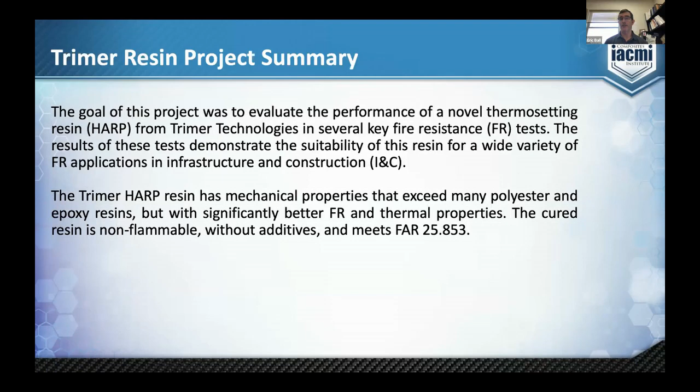The goal was to test the Trimer resin. It has mechanical properties that exceed many polyester and epoxy resins, but has significantly better FR and thermal properties. In fact, the cured resin is considered non-flammable, as opposed to non-combustible, without additives, and it also meets a FAR standard, which is a flammability test for inside of aircraft.

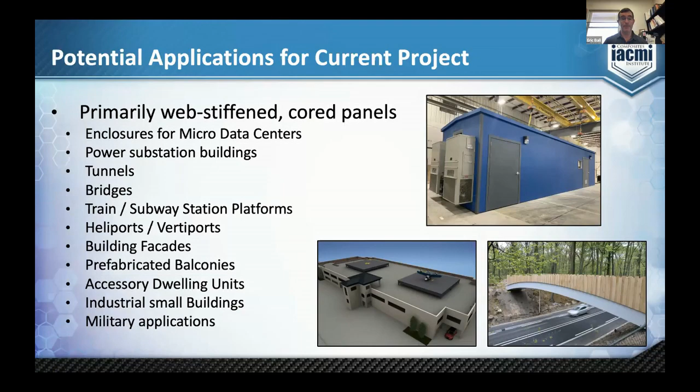So what are web stiffened cored panels? These are all vacuum infused structures. You have a laminate on the top and bottom, and they're connected together with a web. And there's a foam core in the middle that's typically, it can be structural or non-structural, and we tested both.

You can see this within this concept. We can change parameters, of course, the web spacing, web thickness, skin thickness, and of course the fiber architecture. That image on the right is a vacuum infused panel based on this concept.

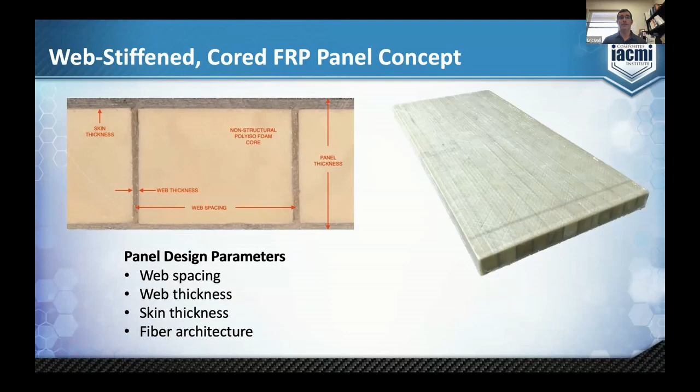So the Trimer resin can be processed with a number of different processes. We focus entirely on infusion, but you can also use RTM, filament winding, or pultrusion.

One of the unique things about this resin is that it needs to be cured at a fairly high, medium temperature, 100 to 150 C. So it's not a room temperature cure.

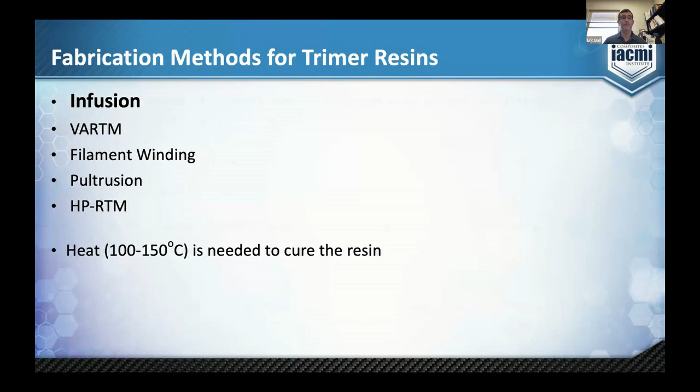So the test schedule that we put together, we eventually wanted to get to an E119 test, which is a pretty tough test to pass. It's really a burn through test.

But we start out with some simple calorimeter testing, which is E1354, to help us decide which direction to go.

We also did E84, which really wasn't necessary to determine how to get to E119, but it was interesting in terms of smoke and flame development. We also did an E119 mini test, which again was a low-cost way to help us decide the final configuration for the E119 tests.

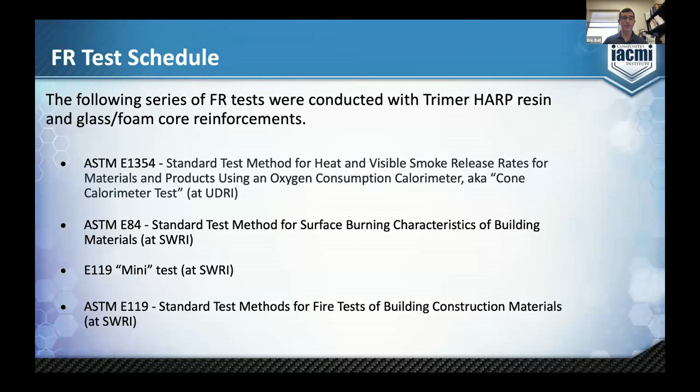So the calorimeter test, here you can see on the left an example of this test, and the machine there on the right. This test measures the fire characteristics associated with heat and smoke output.

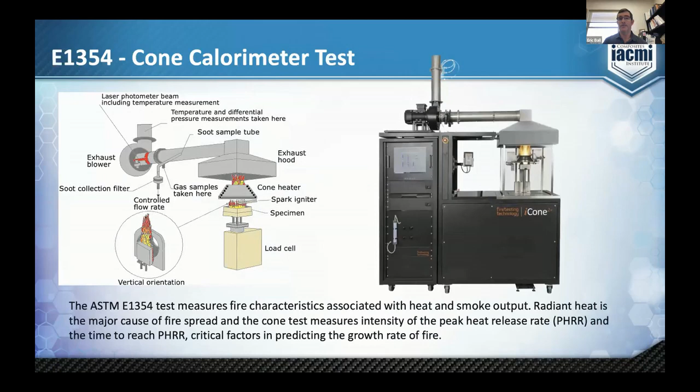So we put together for the calorimeter test 4 different tests. We had 2 different Trimer resins along with 2 different coatings, and we used a ceramic hybrid red coating manufactured by a company in Finland called Finnester Coatings.

As well as a Tecnofire product manufactured by Technical Fiber Products. All of these samples here were non-core, just solid laminates.

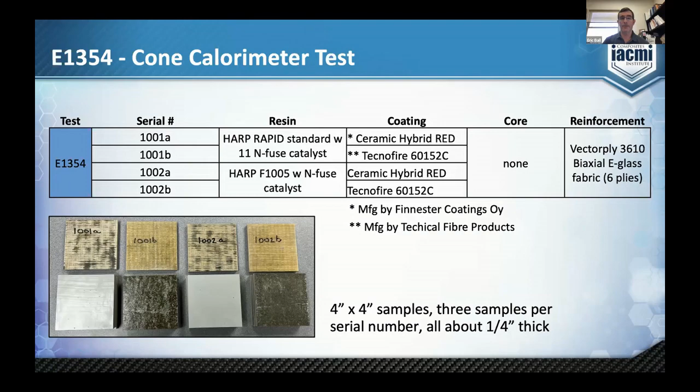This was to help us determine what was going to do best looking at the E119 test. And so these are the coupons here on the picture, 4x4 samples that were run in that calorimeter test.

So here's kind of a shortened summary of those tests. If you want to look at total heat release, you can see that the...

Tecnofire did a better job overall, even though it produced a little bit more smoke than the ceramic. But when we look towards the E119 test, it's really more important to prevent temperature rise and burn through.

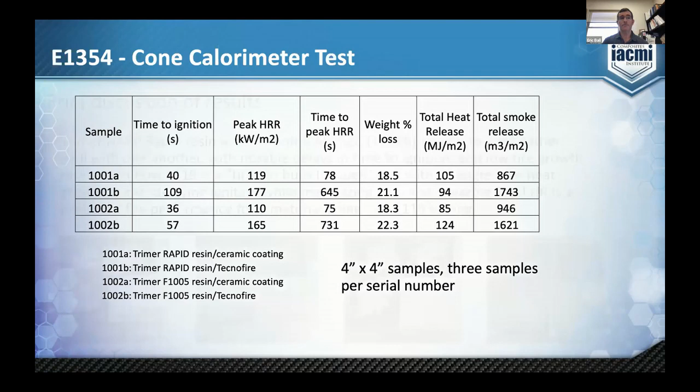The ceramic materials kind of broke apart, that's the first and third one. So going forward, we felt like the Tecnofire was going to do a better job at protecting the laminate going into the E119 test.

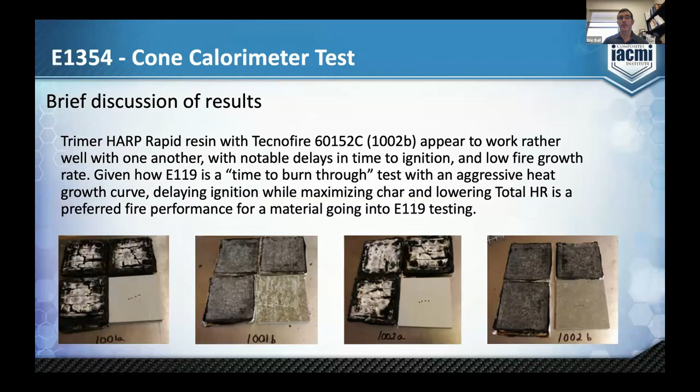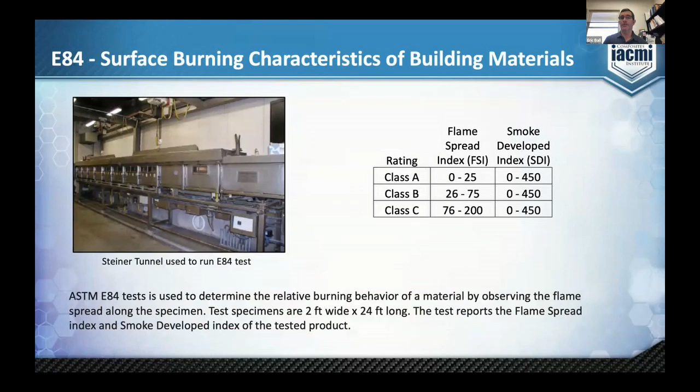In those tests, we did one with no coating and one with Tecnofire on the surface.

It's a pretty thin resin, under 200 centipoise. It had some unique characteristics as opposed to polyester. We had to use some interesting films on the vacuum side, or the vent side, to keep it infusing properly.

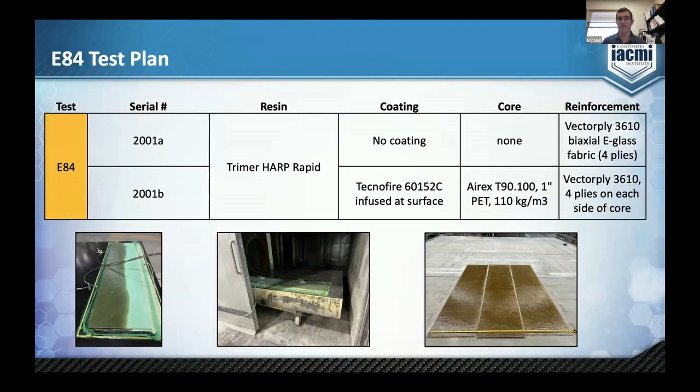So there's the test results. On the far left is the panel with no coating, and the third one over here is the one with the Tecnofire on the surface. And of course, you can see after the test the burn marks there.

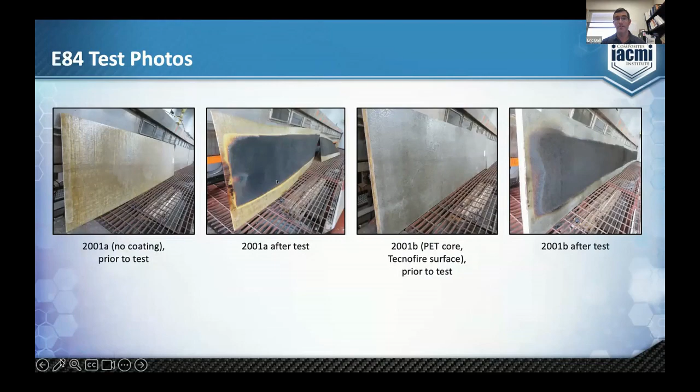This was kind of interesting. The laminate with no coating had a flame spread of 15, but a smoke development of only 250, whereas the Tecnofire had a smoke development of 400.

And that's because the Tecnofire has to burn in order for that intumescent to work, and it added to the smoke.

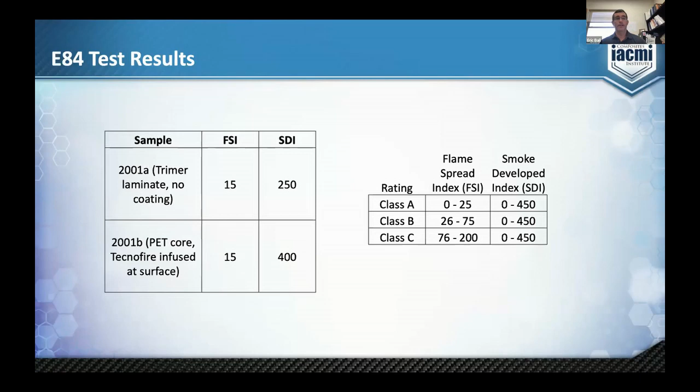So if we're just looking at straight E84 results, the Trimer resin with no Tecnofire would perform better. But as you'll see later, that Tecnofire is important when we look at the E119 testing.

So E84, where does it matter? If you look in the International Building Code, there's a lot of places in buildings where that really does matter. So this resin would work very well in a lot of building applications where they're occupied. This is table 803 in the International Building Code.

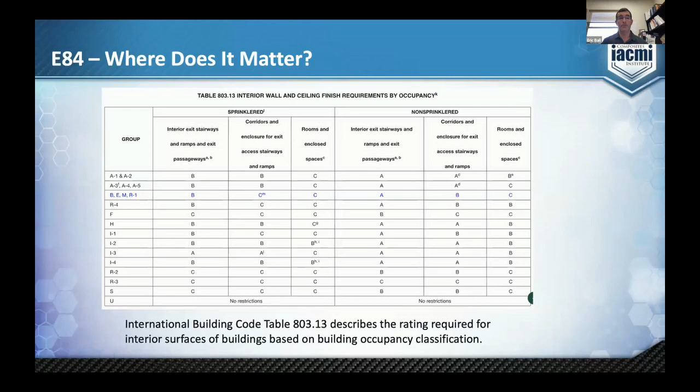Next we went to the E119 mini test. Again, we tested the ceramic hybrid red coating with Tecnofire, and we did two different cores. One was an Airex, a structural core, and we also did a polyiso core. The polyiso core was built with webs. The PET core had no webs.

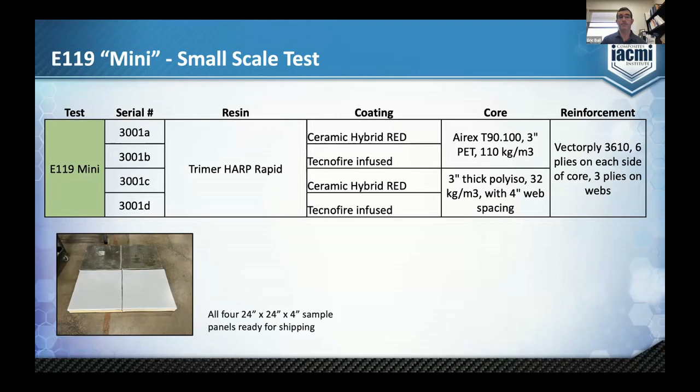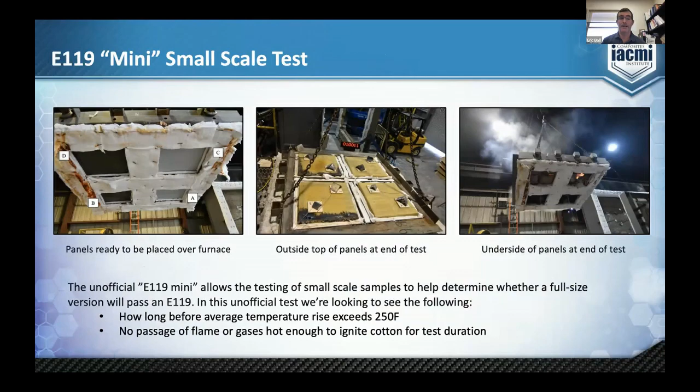This is a mini test. They're 2 foot by 2 foot panels. On the left, you can see before the test is started; that middle one is in the middle of the test, and then at the end of the test, you can see the panels being pulled up, and you can see some of it still on fire there. To pass this test, the temperature on the back side, the non-exposed side, can't exceed a temperature rise of 250, and you can't have any passage of flames.

So here's the test results of the mini test. The ceramic red coating went 48 minutes before the temperature exceeded, and the Tecnofire went 51 minutes. Then the polyiso webbed core went 58 and 59.

This was a ceramic red, and this is Tecnofire. Now if you look at it over here on the pictures, you can see where the material that had the ceramic red kind of fell apart and really burned up. These temperatures get super hot, like up to 1800 degrees. So the Tecnofire provided some pretty good protection to a thermal break.

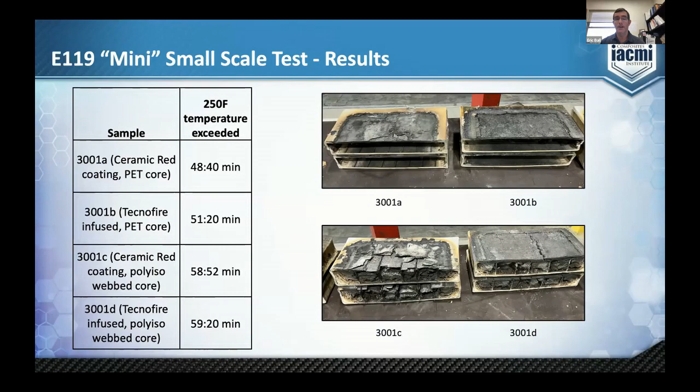So here's the E119 test. I should back up here for a second. After these mini tests, it was determined that the polyiso was a better core, and the Tecnofire coating was a better coating. The webs actually provided pretty good protection for the panel, because the surface that was exposed to the furnace or the temperature pretty much got destroyed in all cases, but the webs and the backside were still intact and provided good structural strength.

So here, the full E119 test is pretty large, and a very severe fire test. It has to sustain an applied load during the fire test, no passage of flame or hot gases, and no openings will be developed. There's a hose stream test at the end that can't allow water to pass through. And again, you can't exceed a 250-degree temperature rise.

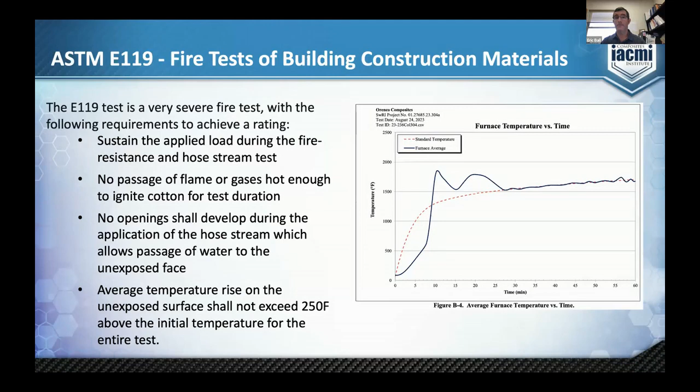Here's just an example of the panels being infused. On the right are the two. We did both a floor test and a panel test. The floor panel was 12'8" by 15'8", and the wall test is 12 by 9. We went to a 4-inch thick panel. The mini tests were only 3 inches, and we did that because we wanted to achieve an hour rating, because that's a rating that the IBC finds meaningful for a lot of standards.

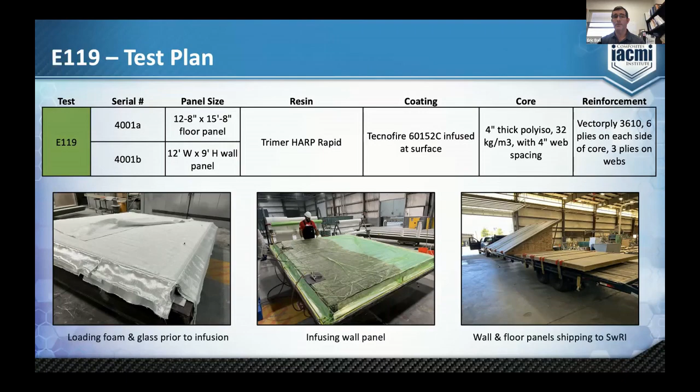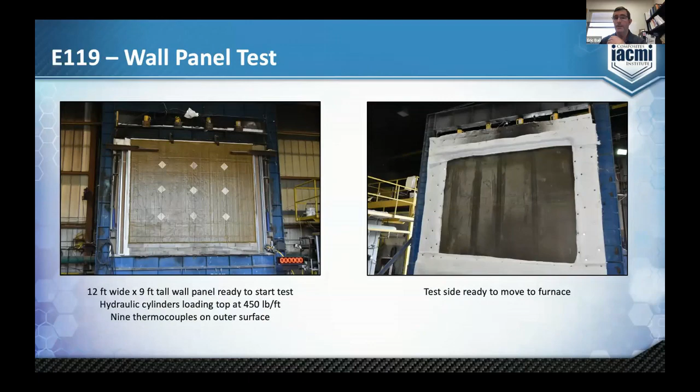So here's a wall panel test. It's 12 feet wide, 9 foot tall. It's hydraulically loaded to the top at 450 pounds per foot. And on the right there, that's the inside that's going to be exposed to the furnace.

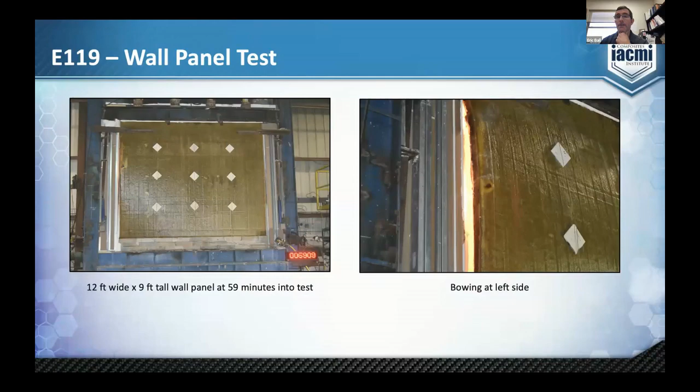Here's 59 minutes into the test. It's still, you can see it's bowing on the right-hand picture. It's bowing quite a bit, but it's still maintaining that 450-pound load.

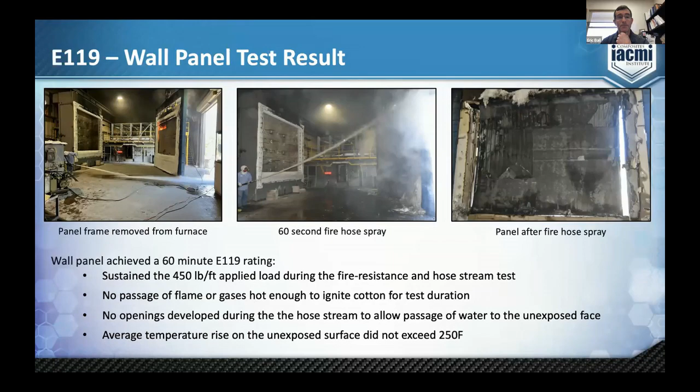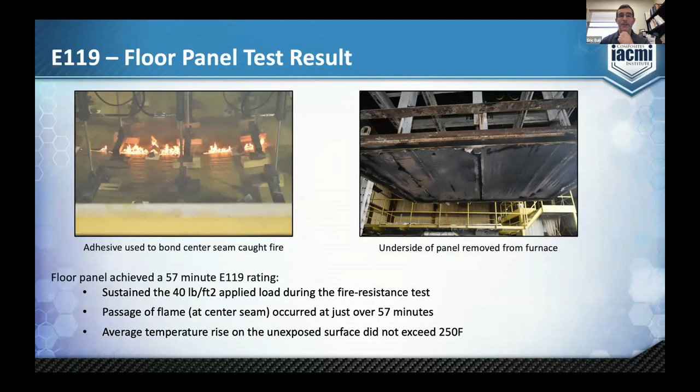And then here's a floor test. It's similar. It was loaded at 40 pounds per square foot during the furnace test. This test, unfortunately, we built this panel in 2 pieces and bonded it together, and it failed because of the adhesive we used in the tongue and groove joint. It would have passed an hour easily had we done that joint a little bit differently, or had built the panel all in one piece.

So key takeaways for this: trimer resin based laminates easily will pass a class A E84 without coatings or additives. It's something we're going to be looking at, doing an NFPA 286 test, aka the room corner test. We believe it will pass very easily without any kind of coatings, and this test is planned for later this year. The Tecnofire intumescent fabric is not necessary for the E84 surface burn, because the trimer does a great job without any intumescent.

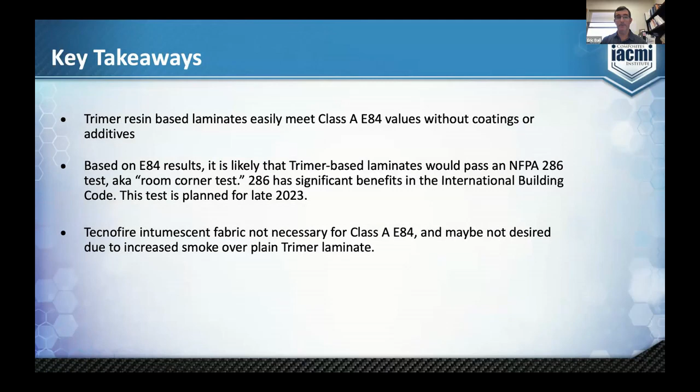The vacuum infused web stiffened FRP panel achieved the E119 rating in 1 hour. This is really super significant for a composite wall structure. The floor panel would have passed easily if we were to do that again. It's predicted that this test would have failed to meet the 1 hour standard without two things: a web stiffened core design, and that Tecnofire intumescent fabric. It's not just the resin by itself for this E119 test, which is a very, very tough test to pass.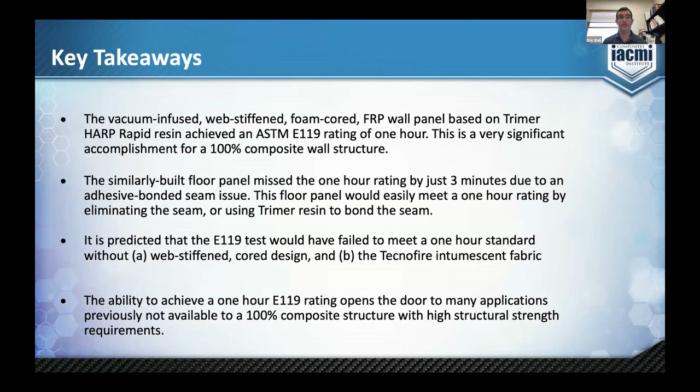That's kind of a short summary. I want to thank everybody involved in the project, including Henry from Trimer, the folks at IACMI that helped support the entire project, UDRI and Southwest Research that did a lot of testing. I was at Southwest Research, and it was pretty fun going down there, and they're super helpful in understanding all the fire testing they've been doing for decades down there. And then the support from Technical Fiber Products for the Tecnofire materials. That's about it. Thanks, Dale.

Thanks, Eric. It's always fun to go see something get blown up or burned up, or whatever in this particular case. Yeah, so we're kind of right on time for the 20 minutes. So if folks have questions, please put them in the chat or in the Q&A and Eric will get to them.

One of the questions: outside of buildings, would this technology also be useful for passenger ships, ferries, where you have cars? Absolutely. Depending on how structural the application is, just single skin laminates would be great. They've passed that FAR value, a FAR test for inside aircraft. I can imagine lots of applications for laminates on shelter buses, tunnels, train stations. If you want to get something more structural, like a bridge or a heliport, I think there's great advantages there too. You just have to be smart about how you put the whole thing together and look at what tests you need to pass to be applicable.

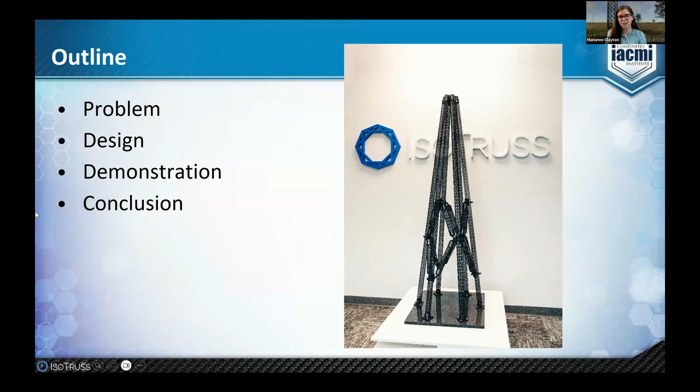Our project was looking at wind turbine towers. These are really big towers. Like Dale said, IsoTruss does telecom towers, but can we use the same technology and apply it at a larger scale? We wanted to demonstrate that this was feasible with a demonstration piece. The purpose is to create infrastructure for wind turbines that's easier to install and corrosion resistant, so it will be longer lasting while still having the same mechanical performance as current solutions.

The issue is that this location is only available for a few months in the year, and the only way to get to the top is a dirt road, so it's not possible to get anything too heavy or a crane or big equipment. What was feasible was only a small steel tower, and it kept breaking due to high winds and snow. So they approached us for a different kind of solution.

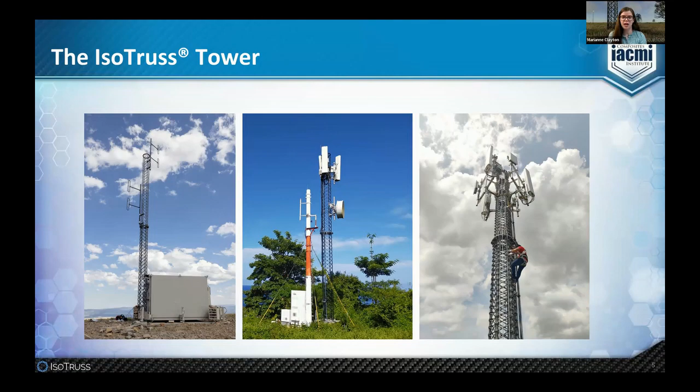So how do we take this technology for these smaller scale towers and make it for a wind turbine? First I'll talk about the tower design. We focused on 3 challenges of steel towers for wind turbines. First, transportation - you have really large components that are heavy, so you need specialized equipment to transport and also specialized routes. You can't go under overpasses, you can't make tight turns, and that makes it challenging to get the components from where they're manufactured to the installation site.

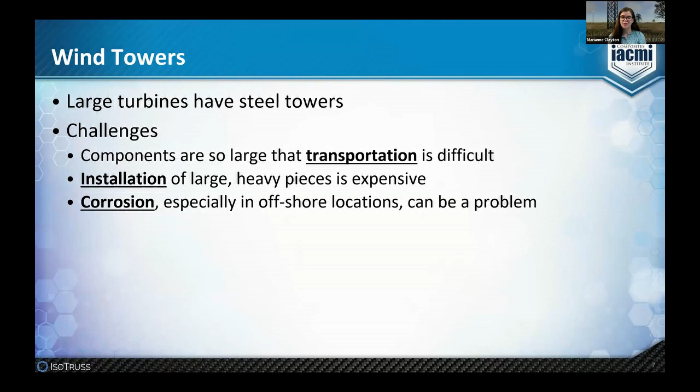Second, installation is expensive and time consuming because of large heavy pieces that need big equipment to move into place. And then third, corrosion can be an issue with steel, especially as more wind moves to offshore applications. It would be nice to just have that not be an issue.

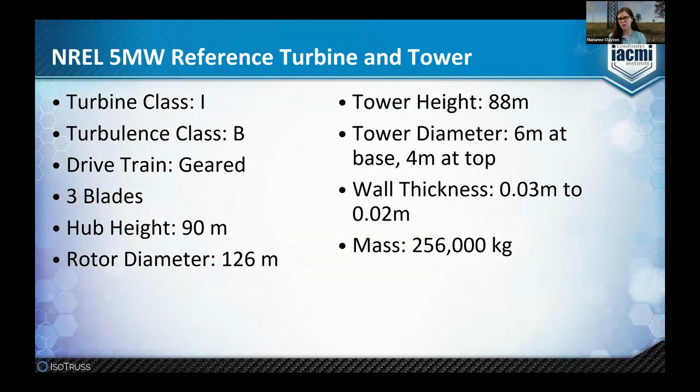So for this project, we used an NREL 5 megawatt reference turbine, and you can see the specifications for the turbine itself on the left. We put this information into the WISDEM software to get the specifications for the tower. This tower is 88 meters high, it's tapered - 6 meters at the bottom, 4 meters at the top - and you can see the mass is 256,000 kilograms.

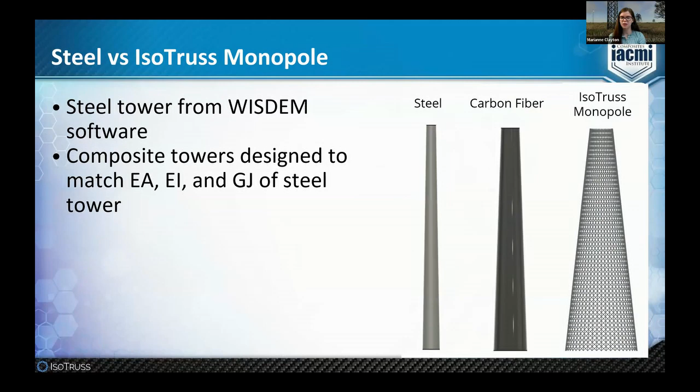The first design was to create the same monopole design tapered tower out of carbon fiber - a solid carbon fiber piece - and then also out of IsoTruss. These were designed to match EA, EI, and GJ of the steel tower. Here are the dimensions from that analysis: the steel tower is 6 meters at the base.

The solid composite is 14 meters at the base, and the IsoTruss tower is 30 meters at the base, which makes sense - you're working with material that has different stiffness properties, so to match stiffness needs a bigger base. Significantly though, the composite solutions are a lot lighter - the weight is reduced by about half for the composite solutions versus the steel tower.

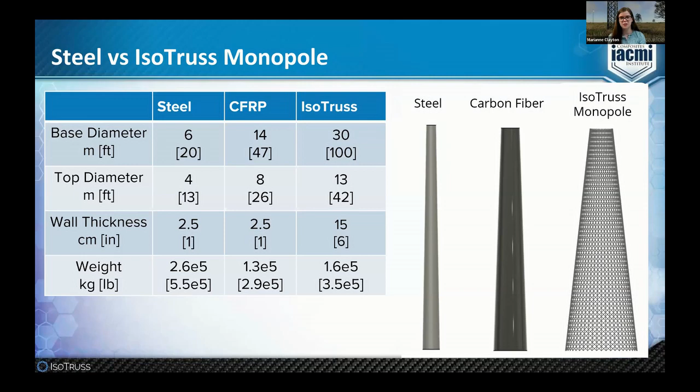So going back to those 3 problems with steel towers: transportation isn't really helped - they're lighter, but they're even larger components, so all the issues with needing specialized equipment to transport and specialized routes aren't actually helped. Installation, it's difficult to say if it's better or not because the components are lighter but also larger, so maybe it evens out with not a clear advantage there. And then of course, composites are more corrosion resistant, so there is a benefit there.

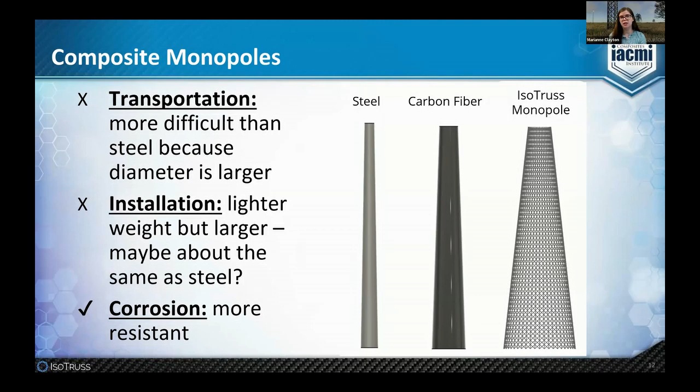So rather than just trying to replicate the steel design and just change the material, we decided to take a different approach and look at a different design that takes better advantage of the unique properties of composites. That's this you see here, a modular IsoTruss tower is what we called it. This picture on the right - each line is a 20-foot IsoTruss section that are shipped just as individual sections to the site and then assembled there.

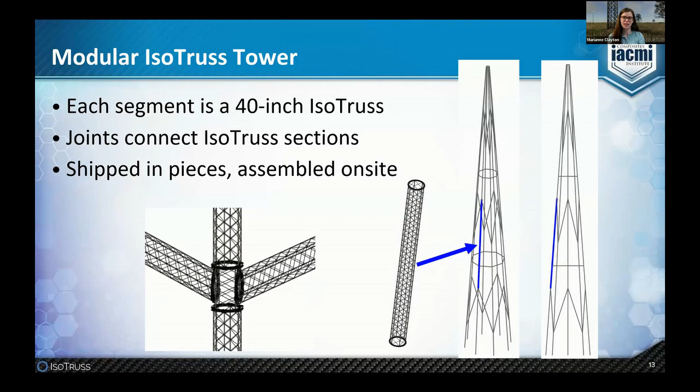The key to this design is to have joints that are effective both structurally and also for installation to be easy and in a timely manner. The large benefit here is to not need as much specialized equipment to get the pieces there because it's just shipped in building blocks and then assembled on site.

So joints, what do you do to connect the sections? Here's a couple pictures of other IsoTruss joint applications. So on the top, this is an IsoTruss bike and it uses solid composite connections. This is assembled in a manufacturing facility and then shipped fully as one piece. And then on the bottom is a close-up of a tower joint, which has flanges built in to the IsoTruss sections that allow these plates and bolts to connect the tower pieces together.

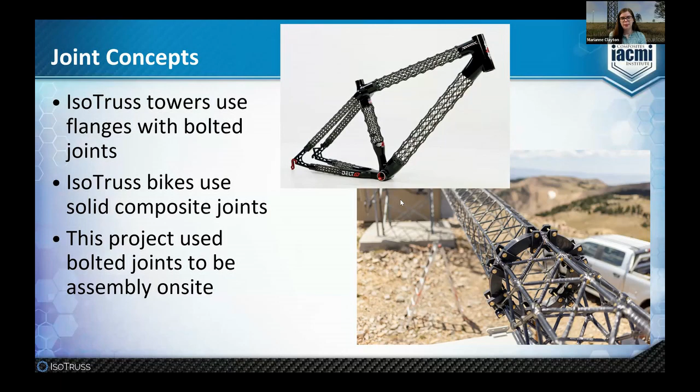And for this one, we went with a design similar to the towers with bolted connections so that they could be easily assembled on site. So here are those same dimensions for the modular IsoTruss tower versus those other designs that I showed earlier. And the modular IsoTruss design can match the dimensions of the steel. So 6 meters diameter at the base, 4 meters at the top, but significantly it weighs much, much less.

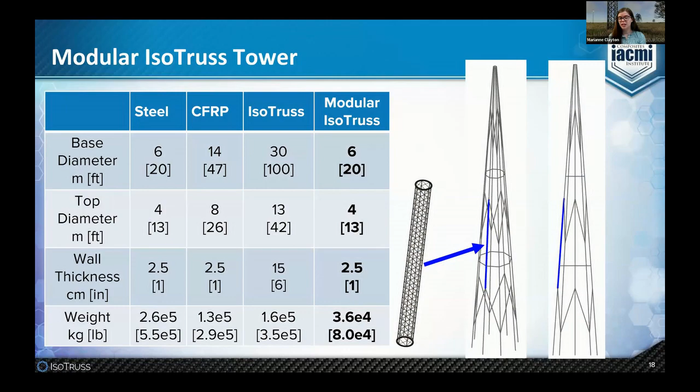And this table shows all of those numbers as a factor of steel. So the solid composite has a base diameter 2.5 times that of steel, the IsoTruss 5 times that of steel, and modular IsoTruss the same as steel. And you can see on the bottom the weight that the modular IsoTruss solution is only 1/10 that of steel.

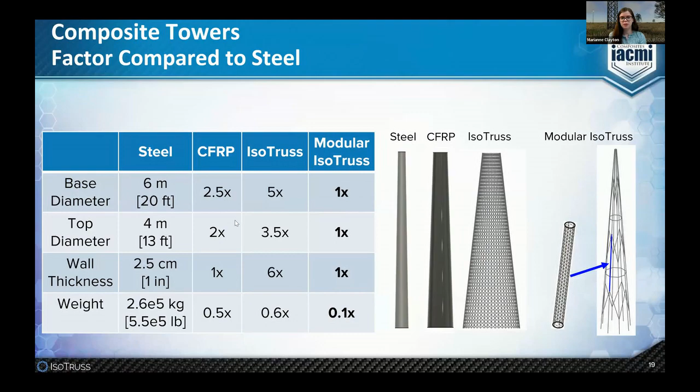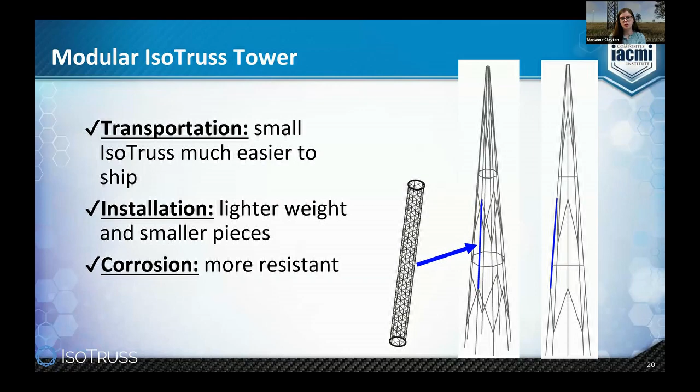So if we look back at those 3 challenges to steel towers, transportation is a lot easier. You can put the IsoTruss sections in a typical shipping container on the back of a semi truck to get it to the right place. Installation is easier. You're just moving small, lightweight pieces around, and then you get the same benefit of corrosion by switching to composites. So that leads us to the demonstration piece.

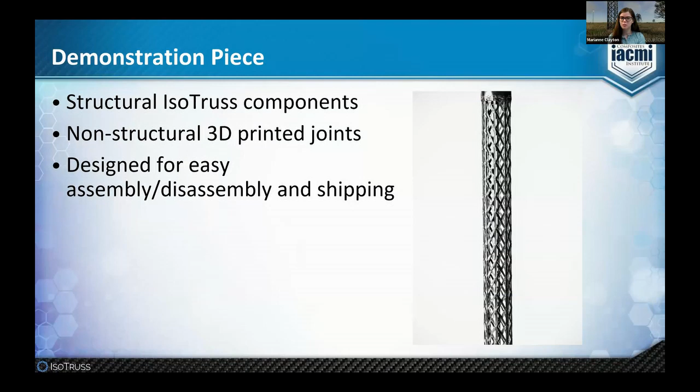We wanted to show what this looks like in real life. So we took structural IsoTruss components, and then we have non-structural 3D printed joints just as concepts for what this might look like. And we designed it specifically for easy assembly and disassembly so that it could be shipped to different places. Here's pictures of the completed thing. And it is meant to look like the modular IsoTruss solution where you have building blocks of IsoTruss sections that are put together for the full assembly.

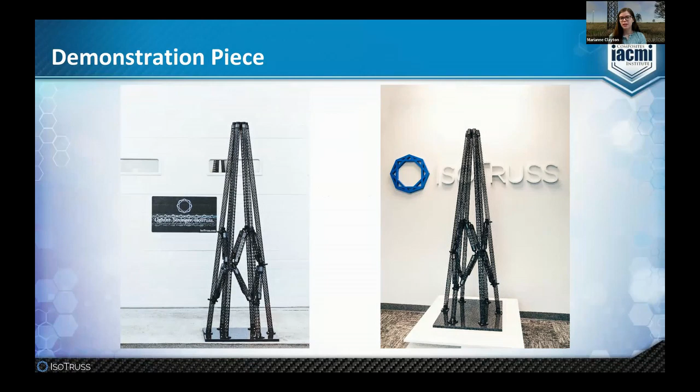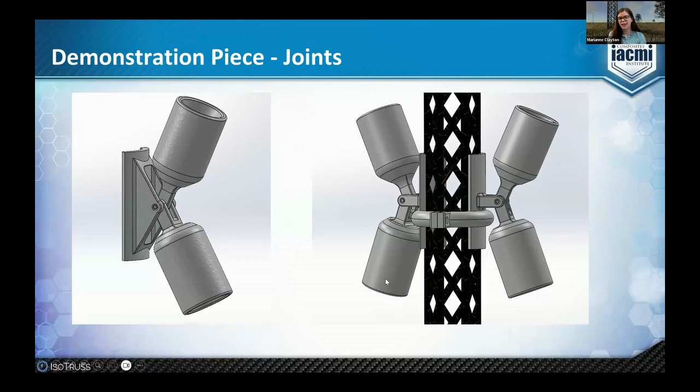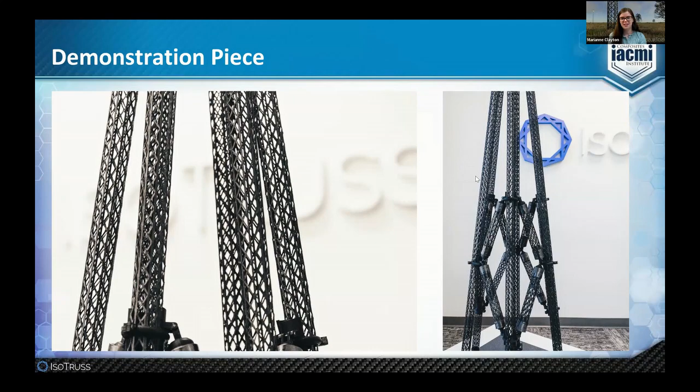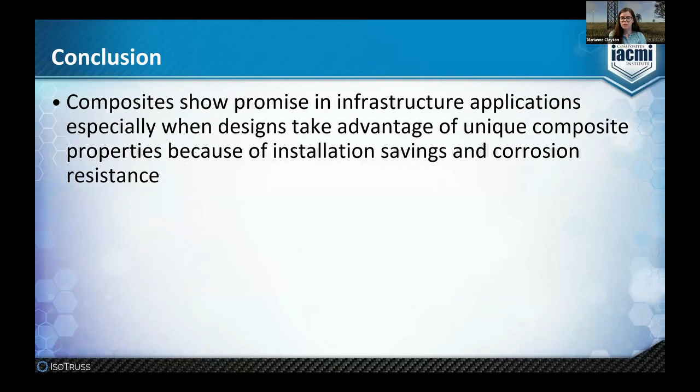So conclusions. I think this project shows, like many other things, that composites have promise in infrastructure applications, but it's important to use designs that take advantage of the unique properties of composites rather than just trying to copycat steel solutions. And I think where composites really shine in infrastructure applications are where they can have installation savings, both in time and cost, and then also corrosion resistance. And we've also learned some important future research opportunities from this project.

So material costs are one of the highest components of the product. And so doing things to reduce material costs, like different manufacturing methods, switching from pre-preg to infusion or other wet winding, different ways to reduce material costs, or potentially even switching kinds of fiber, has a big influence on the cost. And this is important because we've seen customers are generally unwilling to pay a premium for products, even when they have better features and longer lifetime guarantees in infrastructure. They need to match cost with steel, and then the added lifetime benefits can put people over the edge for adoption.

Manufacturing scale is important because you're competing with commoditized materials. So a hand layup process isn't going to cut it. It needs to be something that can have low manufacturing costs and be at a scale that can compete. And then joints, having effective joints that are easy to install and that work effectively could open up numerous opportunities for IsoTruss and other infrastructure applications.

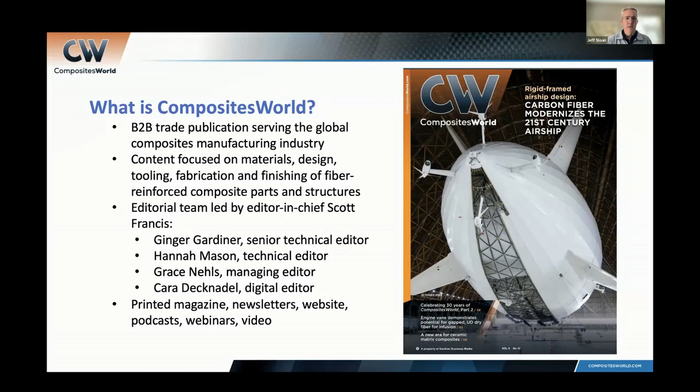So, proud of this brand, feel like we do a good job of serving the entire industry, focused on design, tooling, fabrication, and finishing, and serving all the major end markets: aerospace, automotive, marine, consumer, etc. So that's us. That's our place in the market, and appreciate you consuming us and supporting us.

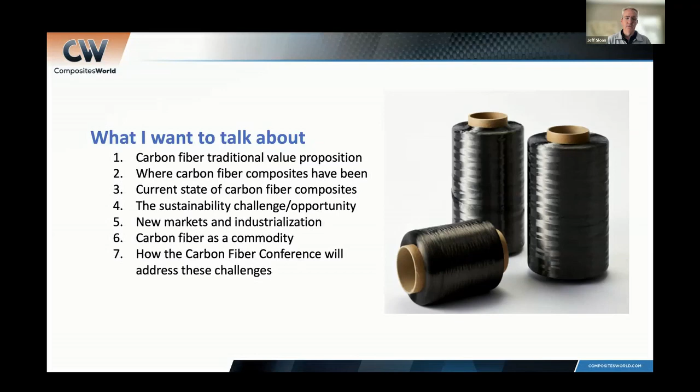All right, so what I want to talk about today, these 7 things. I want to look at the traditional value proposition for carbon fiber, which I think is pretty straightforward. Where carbon fiber has been, what I see as the current state of the industry, sustainability challenges, new markets, the commoditization of carbon fiber. I think Dale called it democratization, which I think is suitable as well. And then I'll talk briefly about how the Carbon Fiber Conference will address some of these challenges and where we are today.

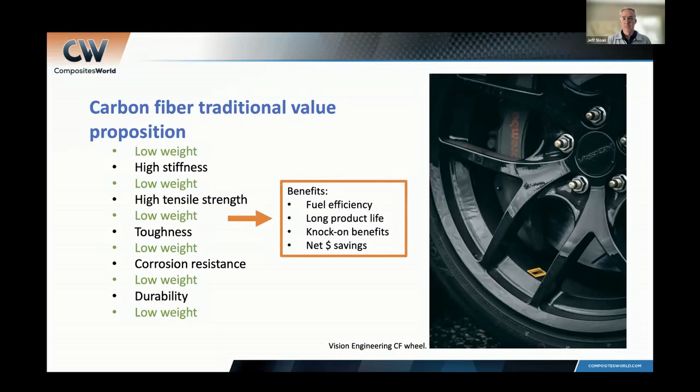And all of this combines to create some really compelling benefits for manufacturers. Fuel efficiency is the big one. Extended product life, and then you get knock-on benefits. If you're reducing weight in a structure, it allows you to reduce weight in other components of a structure or a part, and then you get ultimately net savings. And that's been the argument that the composites industry has made to prospective customers throughout the life of this material. And none of that's new, and I'm sure that all of us are very familiar with that.

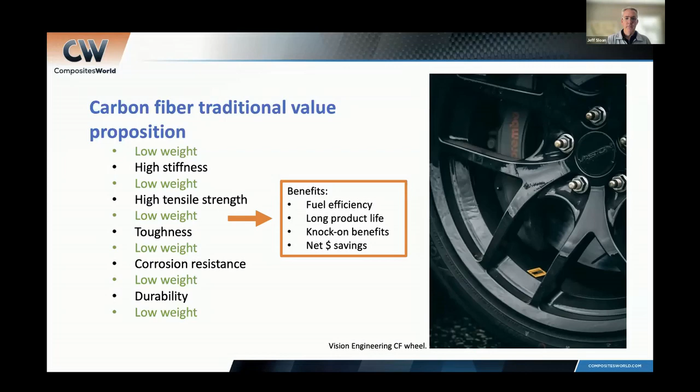So this is my assessment of where the industry has been over the last, let's just say 30 to 40 years. My argument is that through the 80s and 90s, composites were primarily a displacer of legacy materials. So if you think about the use of wood or concrete or titanium or steel or aluminum, composites were usually positioned as a way to improve an existing application by displacing a legacy material. And this gave birth to black aluminum. And this is primarily how composites, quote, earned their way onto applications or into markets.

A lot of that changed in the early 2000s when Boeing with the 787 and Airbus with the A350 decided to use carbon fiber in primary aerostructures for the first time in a major commercial aircraft. This was enabled primarily through advances in automation, automated tape laying, which you can see there on the A350 lower wing skin, and the 787, which you can see as well there on the forward fuselage.

These technologies allowed fabrication of large structures more efficiently and effectively in a way that made it make sense for Boeing and Airbus to use on those aircraft, which increased the efficiency of the aircraft, reduced weight, fuel savings, and then all those knock-on benefits that I mentioned earlier. We also saw this happen with the F-22 and the F-35. The F-22, of course, is no longer being produced, but the F-35 is.

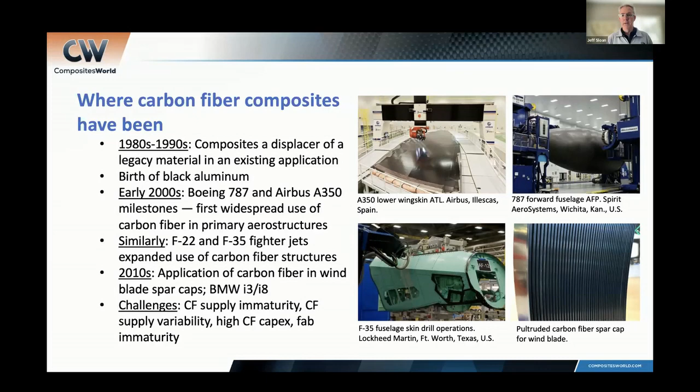challenge for the industry. All right, so where are we today? Carbon fiber is very well penetrated into some markets that have made really good use of this material. Aerospace is the most valuable in terms of carbon fiber use.

But in terms of volume, wind is the largest, and largest by far. And wind over the next 10 years is expected to grow even more. I think by 2028, the expectation is that the use of carbon fiber in the wind industry will potentially double. And so we're seeing a lot of material going into these markets.

I've listed here some of the aircraft programs or aerospace programs that are using carbon fiber significantly. The 787 and the A350, of course, we've talked about the F-35. The LEAP engine is on the Airbus A320 and the Boeing 737. The 777X has the very large carbon fiber wings. So a lot of programs, very high profile, well-known programs are using carbon fiber.

There continues to be modest automotive penetration by carbon fiber. There's a fair amount going on with battery enclosure systems. I've got a photo there of the Teijin system, which uses a fair amount of fiber, but also a lot of glass fiber going into that application. Sporting goods continues to be a strong market for carbon fiber. You think about golf club shafts and tennis rackets and hockey sticks. Formula One is a very high profile and kind of sexy use of carbon fiber. And then, of course, pultruded wind blade spar caps continue to be a strong application.

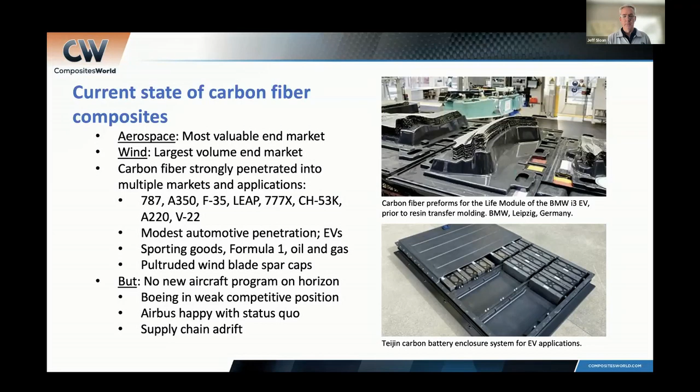Airbus, for its part, is very happy where it is. It's in a very strong position. Doesn't need to do anything differently. But the result is that the supply chain, aero composites supply chain, is kind of in this holding pattern until we have some stronger sense about where things are going on the commercial aerospace side. But that said, there are opportunities in new markets and new applications, which I'll talk about in a second. But right now, the aerospace supply chain is definitely waiting for a new aircraft program and eager to apply some new materials and technologies there.

All right, so the sustainability challenge/opportunity, because we don't talk about problems, we talk about opportunities, and that's what this is. One of the byproducts of COVID, as I think we all know, has been a renewed focus on sustainability, at the regulatory government level and at the business level. And so what we're seeing, of course, is that major OEMs are establishing sustainability goals, and then they expect their supply chain to get in line with those goals and to meet those goals. And then we're seeing as well on the regulatory side, some similar requirements being made, particularly in Europe, but some here in the US as well.

One of the byproducts of that is that there's been some new scrutiny placed on carbon fiber manufacturing. So as I noted earlier, we've always argued that we save weight, and that's the big benefit, and that's good, of course, and that typically has been enough. I just don't think it's enough anymore. Carbon fiber manufacturing is a very high energy process, and it uses a petroleum-based precursor, polyacrylonitrile, which makes the carbon footprint for carbon fiber manufacturing not so good. And so there's a lot of effort now to decarbonize carbon fiber production, development of bio-based precursors, PAN precursors that use biomaterials, and also attempts to get energy out of the process.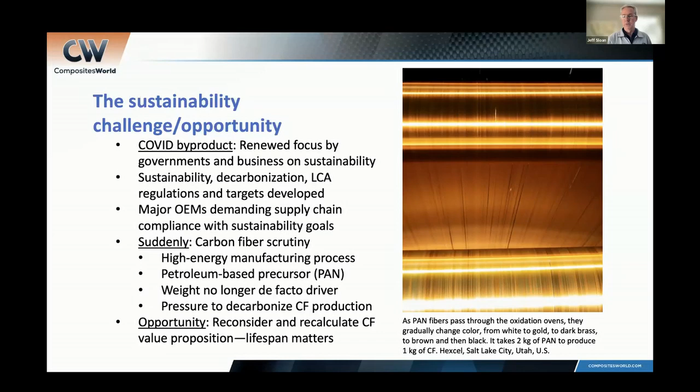All right, so new markets. In response to this global decarbonization strategy, we're seeing a lot of activity that, on the one hand, is putting new scrutiny on carbon fiber and its application, but on the other, increasing its use in certain applications. Probably the biggest one here is the hydrogen economy. When we talk about hydrogen, we're talking about applying it particularly in fuel cells for transportation—trucks, trains, buses, and some personal vehicles. But you have to store the hydrogen, and the best way to store it is in carbon fiber pressure vessels. So that's a big opportunity.

Advanced air mobility is coming, with the first aircraft for this space entering service in 2025 and 2026. There is a lot of uncertainty about how this industry will grow, how quickly, and where, but I think it's safe to say it will be born, and it does use a lot of carbon fiber composites. These aircraft are all battery-powered electric aircraft, and they absolutely need composites to reduce weight and make them viable as a mobility technology.

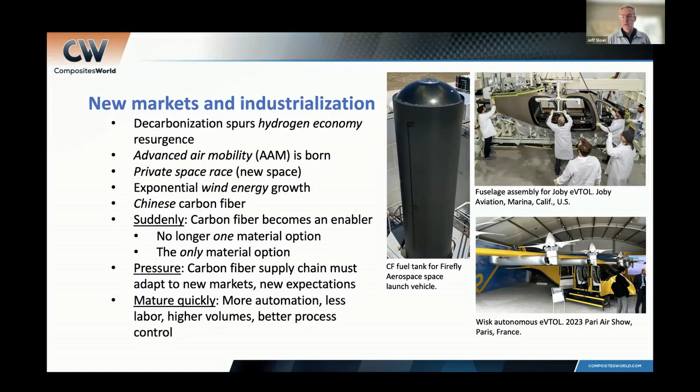In addition, as I noted earlier, the CapEx here is very high. There's a long lead time for expansion, usually about 2 years from the time of announcement to the time of production.

It's a very contract-driven industry, meaning a lot of carbon fiber suppliers like Hexcel don't like to produce fiber unless they have a contract in place for it to go to a particular customer. Without those contracts in place, it makes it difficult for a carbon fiber manufacturer to justify the kind of expansion a market might need. All of these are high barriers to entry.

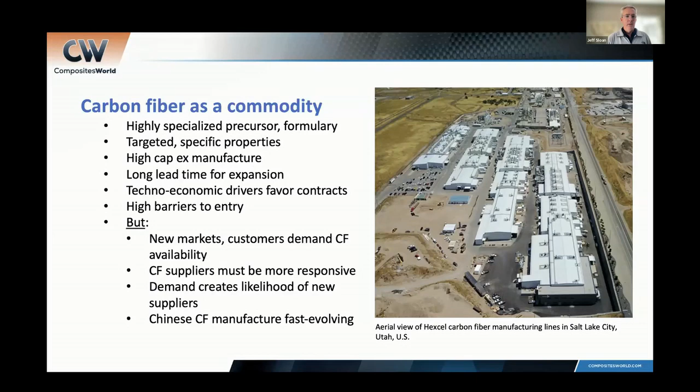All of this will be addressed, I hope, in some way at the Carbon Fiber Conference, which is coming up at the end of November. This is, if you're not familiar with it, the Carbon Fiber conference in its 26th year. It's hosted by CompositesWorld, and this is a 3-day event with a 1-day pre-conference seminar and a 2-day regular conference. It's a business and technical conference with a lot of networking opportunities.

We start on November 28th with the pre-conference, where we'll be looking at carbon fiber use in wind, aerospace, and a look at what's happening in China. We'll finish with our annual look at global carbon fiber supply and demand, which is always very popular. Then on the first day of the regular conference, the 29th, we'll be looking at sustainability, the hydrogen economy, commoditization, and carbon fiber use in 3D printing, among other topics.

On the final day, we're going to start with a panel assessing what happened with the Titan submersible, which was produced by OceanGate. If you recall, the Titan imploded during a deep dive in the North Atlantic over the summer. Lots of questions were raised about the manufacture of the Titan and materials used, but the hull was made with carbon fiber. We'll have a panel of experts looking at the use of composites in submersibles and what is feasible, what is reasonable, and what kind of design considerations need to be made there.